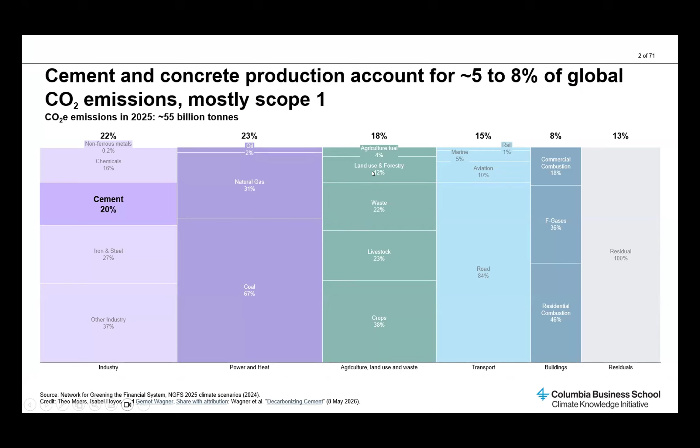And yes, I could easily go into some of this detail now in slides that frankly give a very high-level overview of where the problem is. Yes, in cement, it is clinker production that accounts for 85% of the emissions, and now we can pinpoint 3,600 or so cement kilns around the world, and basically start tackling this problem bottom up. But once again, just as a very quick reminder, here's why I think we are all here.

This is a map of the world. It is temperatures. Actually, to put it differently, it's not temperatures. This is literally how much of the change in the temperatures, pixel by pixel, degree by degree, around the globe, is attributable to excess CO2 emissions in the atmosphere. Right? 10 years ago, it would have taken climate scientists months, years to attribute global average warming to any one particular event, right? Massive storm, drought, and so on. Now we can do this. When I say we, climate scientists can do this like the weather report.

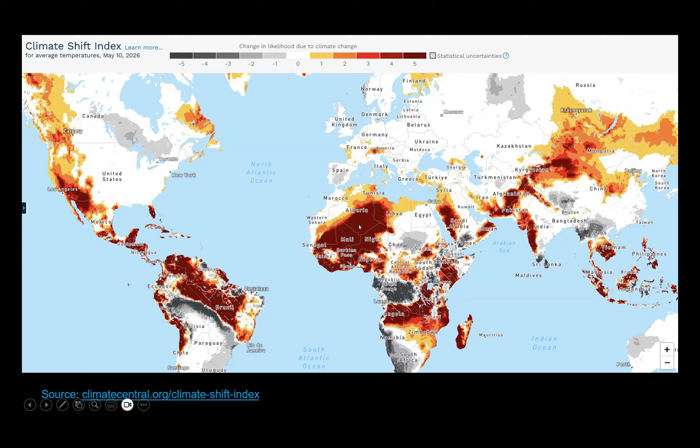Okay, so I'm not a climate scientist either, so I won't spend any more time on this, but we know what the problem is, and we kind of sort of also know the solution. And, don't blame the messenger, but it's always good to show a slide like this and not pointing to climate scientists, but to point to, for example, the Boston Consulting Group, in saying that, yes, here is what needs to happen in order to achieve certain climate goals.

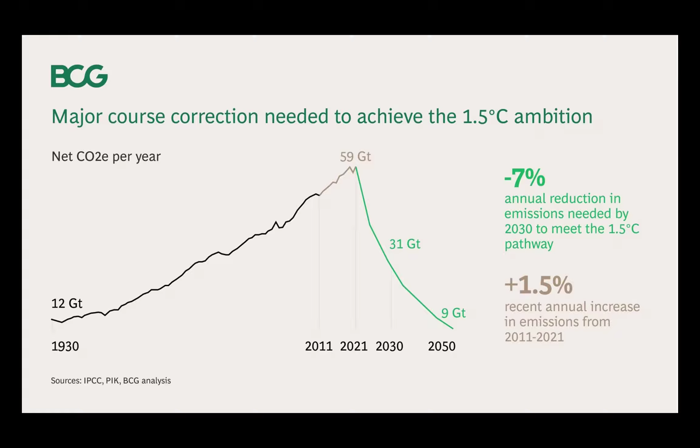And full disclosure, former employee of said consultancy, myself. Again, right, this is not, oh, BCG says that, or McKinsey says that, but it is simply the reality check. Here's the flip side of that reality check. And this is a very US-centric view of the world, and you need to know a little bit about US politics to truly appreciate this graph.

And obviously, this is not cement decarbonization technologies. This is renewables and batteries, for that matter, to enable the decarbonization of electrification around the world. But of course, that is the point, that what we are talking about, for the most part, including for cement and steel decarbonization, are technologies that will actually solve what we need to do. And technologies, by their very nature, can only get better and cheaper over time.

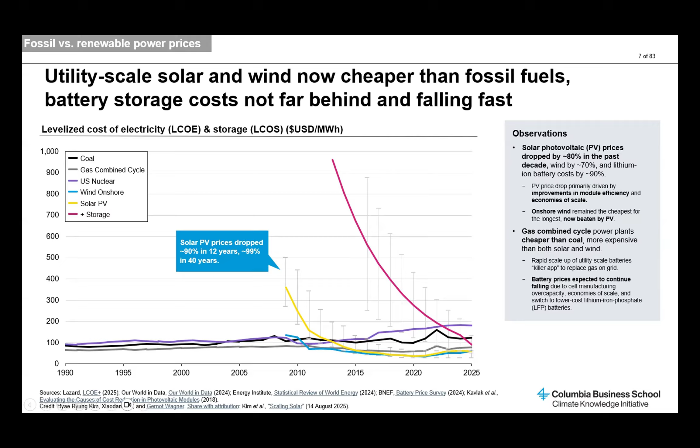But if the techno fix is to look to technologies to decarbonize, well, again, the direction is clear. Those technologies can only go in one direction. Okay, I blamed BCG before. Let me blame McKinsey, or in this case, this is one of my classes. So when a senior partner of McKinsey shows up, he comes with a few slides, which then means I get to steal these slides and show them to others.

Here is the McKinsey version of the world in how to look at these decarbonization technologies sector by sector, technology by technology. And the one thing you might be looking for here that you won't be able to find is cement and steel, or cement and iron, for that matter. There's carbon removal. There are some other fundamental technologies that are important in decarbonizing steel. There's hydrogen, for example, listed here. What's also clear, of course, is that 90% of those technologies are out of the money at the moment.

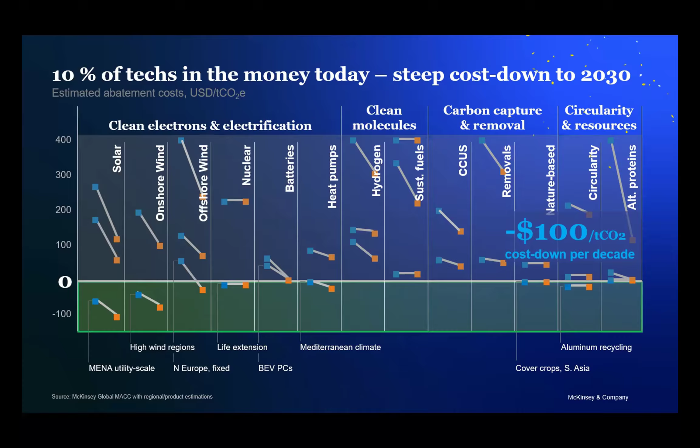Yes, it takes policy. This flip, by the way, is not me. This is McKinsey itself as well, basically saying that, yes, with the right policies, proxied here by $100 per ton of CO2 price by the year 2030 globally. Newsflash, won't happen. But let's just assume that this is the kind of fundamental policy driver.

Yes, back to my own take on things, there are now lots and lots of different policies that, when one dives into the details, will help deploy fundamental technologies that some are in fact in the money at the moment. And okay, a sector like cement, ruthless competition, of course, if it is cheaper to deploy, it'll happen quite automatically. And if it won't, it takes something else.

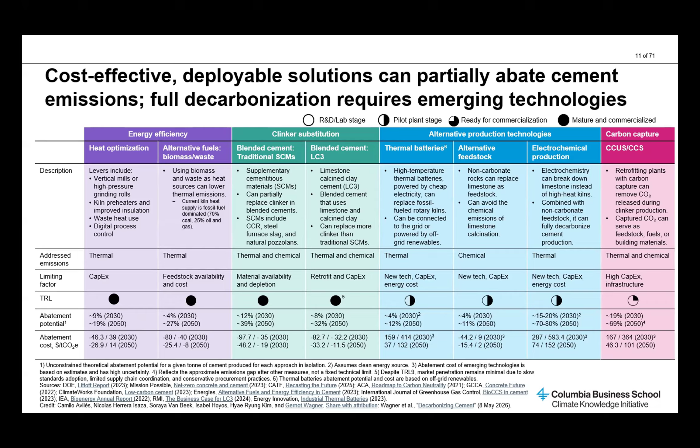It takes top-down policy, it takes bottom-up procurement policies, it takes lots and lots of other detailed policies to deploy these technologies to actually make a difference on the decarbonization front. Here is a different slice at the exact same data. One of these marginal abatement cost curves, for those who know what that means.

Abatement potential on the x-axis, costs on the y-axis. And yes, there are some that right now, 2030 is on the left, 2050 on the right, already pay for themselves. Lots of uncertainties on how much they cost. Yes.

Not a lot of uncertainty around certain kinds of interventions, especially those under the heading of efficiency, basically substituting expensive inputs for cheaper, lower carbon ones, or for that matter, using less clinker in the first place, as one sort of simple techno fix, if you will, that runs up against trade-offs, of course, but still.

Okay. Three quick points in my last three minutes, Alfredo, if I still have three minutes. So here's one. Not if, but when. Right? None of this is if. It is when. This is sort of the classic business school conclusion, right? And if that's the case, then yeah, it is all about speeding up deployment of existing technologies, or for that matter, figuring out how to get the balance right into the R&D necessary to then go to the next D, deployment, right? Research, development, deployment, demonstration, diffusion, and so on and so forth.

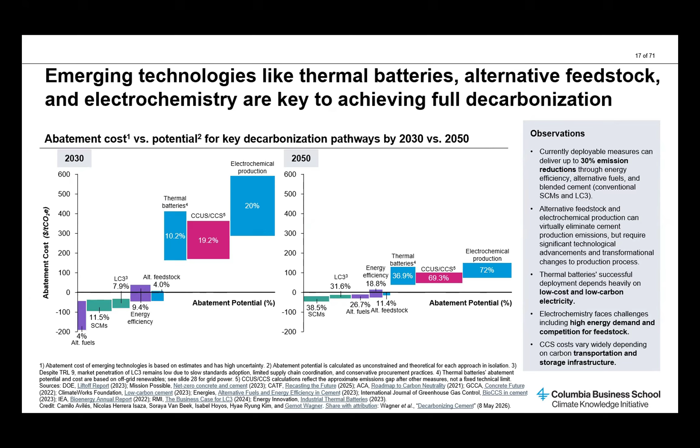Which, of course, leads to the third and last point, which is who pays, right? So the big question, and as an economist, it's always hard to say that there is finite money in the world, right? There is not. The pie always grows, and so on and so forth. But at the end of the day, yeah, there are three sources of money in the world. It's shareholders, consumers, households, industrials paying for the cement, the steel, for example. And then there are taxpayers.

And it's not a secret that there is a fierce political battle among those three groups, where, yes, the CEO of the cement company is going to earnestly say, of course, we are interested in doing X, Y, and Z, but we can't possibly ask our shareholders to pay for it, or our consumers for that matter. So please, subsidies. And that circle, of course, continues no matter where one looks. So when you then look at technologies like LC3 that actually pay for themselves already under certain circumstances, there is the clear question now, who is best positioned to actually take advantage of this?

And let me just end here. Happy to say much more in the Q&A about any of this, of course. But there are certain reasons to believe that sometimes it is developing emerging economies that are actually best positioned to deploy some of these newer technologies, in part because it is a fast-growing sector, in part because costs matter a lot, in part because they are not encrusted structures, tradition, lock-in effects at work, where, yes, Western players, very much looking at the cement industry now, are often looking to CCUS as the techno-fix, carbon capture and storage, right? The add-on that needs to be subsidized, the add-on that needs to be driven by policy, while some others in emerging economies are looking at the more efficiency-focused, cheaper, possibly more impactful technologies from the get-go.

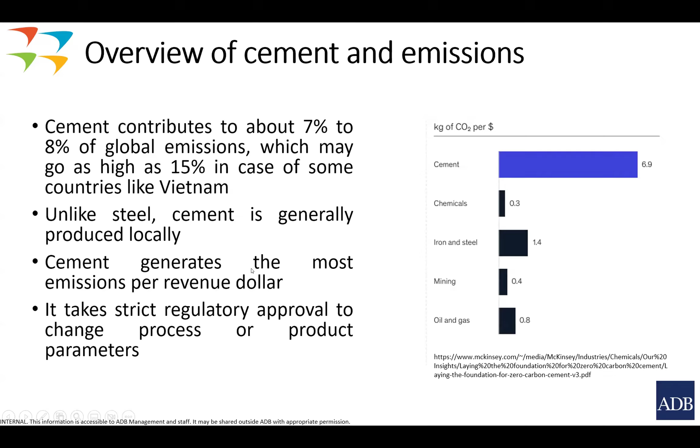Now, let's go a little bit deeper into the whole life cycle of cement making, and at what stages, what is the emission and what is the energy being used. We start with mining. Mining is where 40 megajoules per ton of energy is used, and 3 kg per ton of cement is the emission taking place.

Then you go to crushing, transport, raw mill, and the biggest contributor to emission and electricity is the kiln process and the calciner. This is where the amount of energy used is the largest. More than 70% of energy goes into the kiln, and it also contributes more than 70% of emission. So kiln, calciner, and pre-calciner are the biggest contributors to emission. So our biggest attention for decarbonization will go to this place, followed later by the other processes, which will be cement mill, cooler, logistics, etc.

Now that we have seen all these different processes in cement making, let's try to understand how we reduce the emission. So what are the options? For mining and transport, electrification of the mining vehicles and biofuels is one place where you can reduce emission. When it comes to crushing, transport, and raw mill, renewable electricity will help. Since electricity is used, again, SF6 emission will be there. Energy efficiency will always be helpful everywhere.

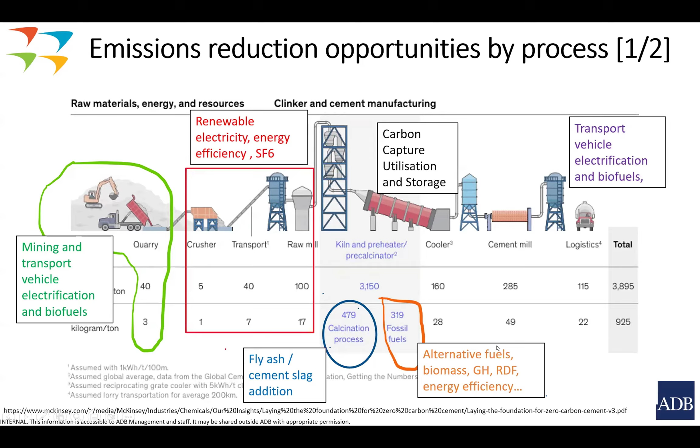Now, let's try to go to the next place. So when we want to see the emission reduction, ultimately, the emission reduction will start with baseline emission minus project emission. That is the old way of doing it. Rather than going to the newer way of classification, let's go the traditional way. So baseline is the most important thing that one has to see. So emission reduction calculation, how we go about it.

Many a times we don't have the data to determine the baseline, and measuring baseline at each and every place will be a little difficult. So one can go a little bit of a conservative way, setting the baselines a little bit higher for lack of data, but we can arrive at some reasonable amount. So one can use the standardized baseline for grid electricity wherever there is one. And in most of the large countries now, fortunately, grid electricity emission factors are available.

Then one can also go for baseline setting based on established international or national standards, collection of past information on energy consumption when we have national regulation already. That is what will help in establishing plant-specific data. But this is actually a fairly rigorous process. One has to establish those regulations, how to measure, etc. For a longer period of time, one has to standardize that, and then one can have the final numbers. But that is one of the best ways to do it.

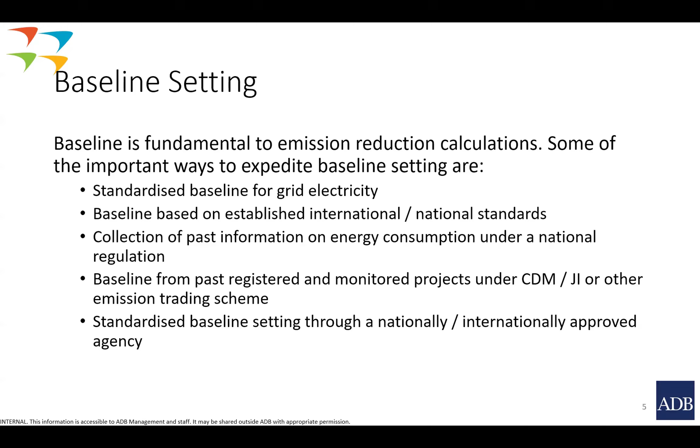Now, the emerging opportunities, and these are some of the later opportunities which are there. One is use of graphene to strengthen the concrete, and it is still very new. Addition of graphene can increase the strength in such a way that it will reduce your concrete usage by almost 10%. That is one of the things. Second thing, what Professor already advised us, was use of LC3.

Then the next thing is substitution of limestone, to replace ordinary OPC with geopolymer cement. That is one of the methodologies which has come. The links are given; we can see it later on. But this is going to be a really interesting thing.

Emission reduction in transport, of course, that is a modal shift option: move to railways, move to something like shipping, etc. And that can work for the clinker as well as the finished product. So that is one of the things one can do. Then change of fuel from fossil to biofuel, we have seen it already earlier. Cast concrete technology is one of the other technologies. The link is given over here; whenever you have time, it can be seen.

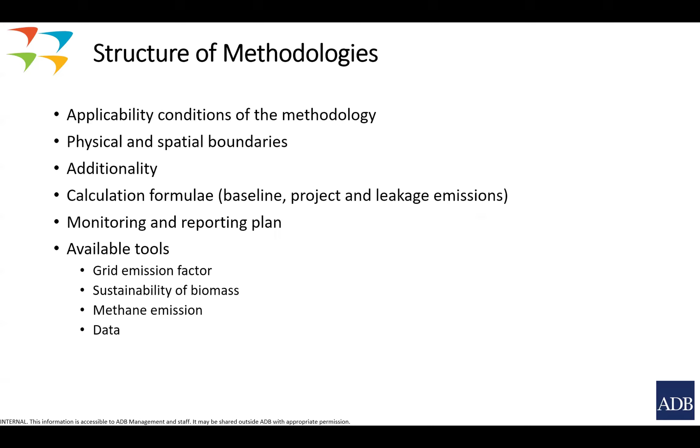Then, having understood the opportunities, the structure of the methodologies is like this. One is the applicability conditions of the methodologies. Then physical and spatial boundaries. Additionality will have to be proven, because we don't want double accounting or business-as-usual cases to creep into the projects when we are trying to get emission credits. Calculation formulas will be there. Monitoring and reporting plans will be there. And there will be a number of tools which will help us to determine grid emission factor, sustainability, methane emission calculation, etc.

Now, issues in baselines will arise when we are trying to switch the fuel. When there is a new plant, there will really have to be a case made for what you take as your baseline fuel. Because baseline fuel generally will be coal, but there can be areas where baseline fuel may be natural gas because coal is not available, in which case the whole baseline will go down and emission reduction itself will come down. That is a likely possibility.

Often, baseline setting is considered at the current baseline, whatever is established practice in the current project. That is something that can happen. Uncertainties can be there when we are establishing new baseline conditions, which can be availability of fuel, availability of regulation, availability of manpower, etc. So these also will have to be taken into account when we are establishing the baseline.

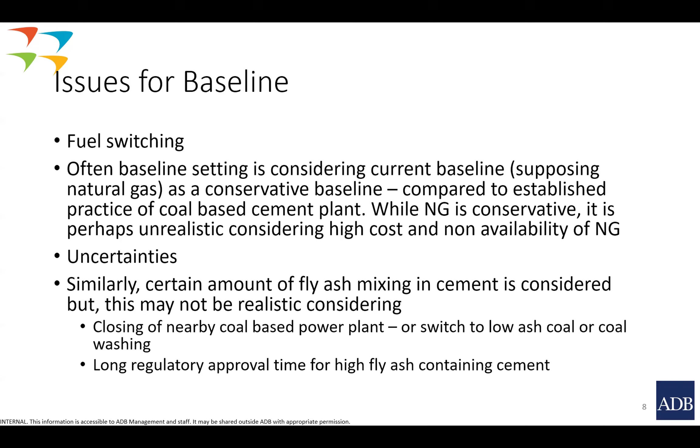Now, when fly ash is mixed in cement for reducing emission, it may be possible that the existing coal-fired power plant, which is the source for fly ash, is going to close down. So taking that for baseline will be an issue. Or long regulatory approval: as I said earlier, when we want to mix fly ash, the regulators are more concerned about the basic strength of the cement itself when we are mixing the fly ash. That is something that will have to be considered, that it will take a long time before fly ash will be coming up.

Now, I'm going by some of the examples which are available under the Clean Development Mechanism. This is project 0473 for optimal utilization of clinker and substitution of clinker by fly ash in India, OCL. In this project, fly ash usage is in PPC manufacturing. Infrastructure modifications are to be done. It requires technological modification. Fly ash transport is added. A fly ash adding mechanism is to be introduced in the whole cement plant, along with installation of a cement vertical roller mill and improved bag filters.

These are all improvements that have to be done in the cement plant compared to the baseline condition. The methodology used for this particular project was ACM0005, and the registered project design document is available through this link. The additionality was proven using combined tools, where technological barrier and market barrier were discussed. The technological barrier is that all these improvements were not there, and it was probably done for the first time in that particular country. Market barrier is, of course, very important. People won't trust cement having such blending. So that is a very much recognized barrier.

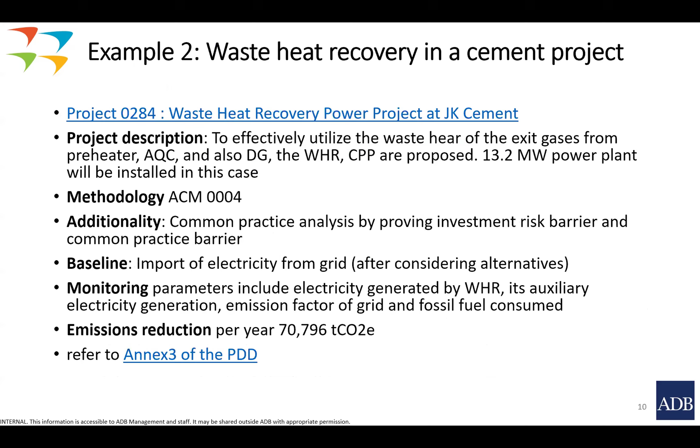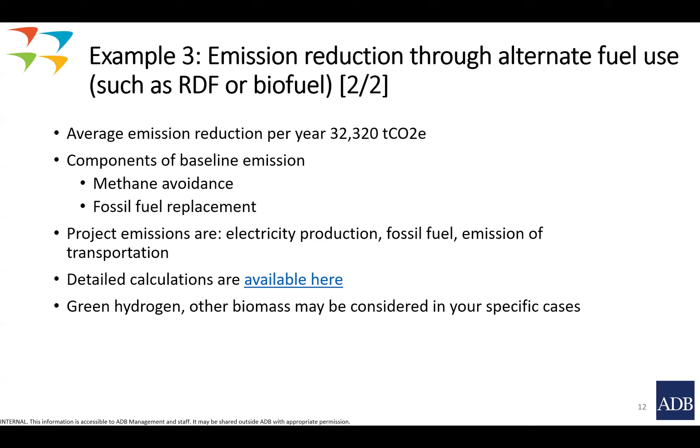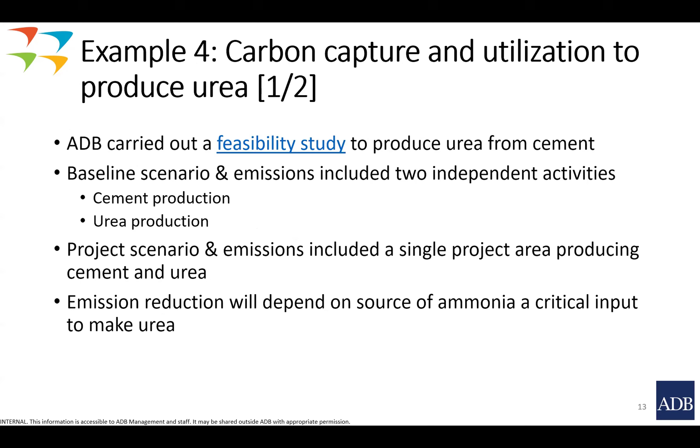So that is the whole thing. This is again now considering the methane emission, which is very much a part of RDF and biofuels. And the other links are there. I think this last part, I'll just leave it for now. It is too futuristic as of now, but let me just tell that it was carbon capture and utilization: capturing CO2, blending with hydrogen and making urea out of it. The numbers you can see over here, we can come back to that later on.

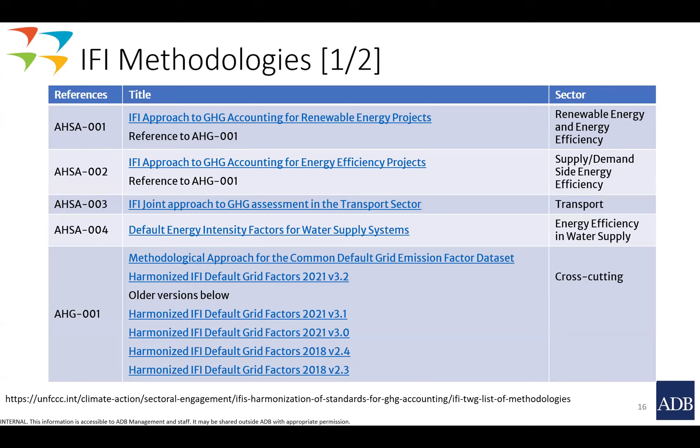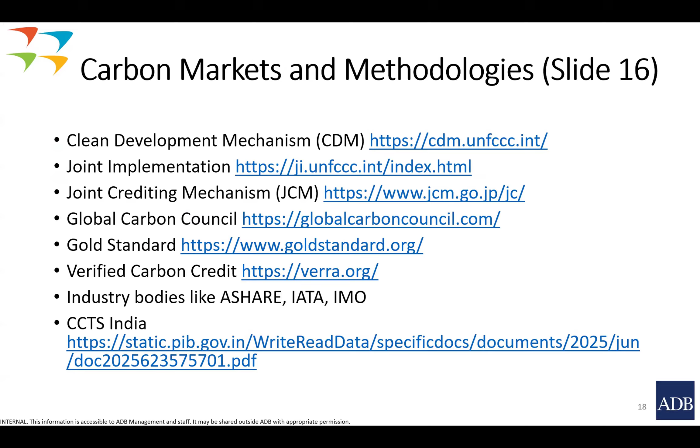And now these slides are giving the GHG emission methodologies which can be used in cement sector in case of CDM. Then current IFI methodologies are given in these slides. And considering the fact that we are not restricted only to CDM now, there is joint crediting mechanism which is coming up. Then joint implementation methodologies are there. Then there are voluntary carbon mechanisms. Then IATA, IMO, etc. are also there. So these are the other carbon markets which may be of use to you.

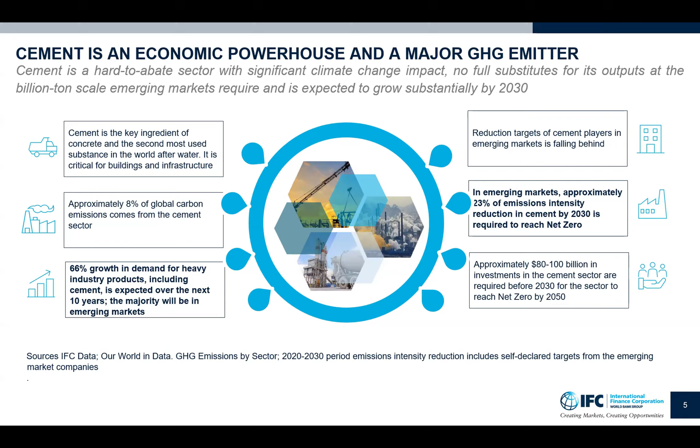And 66% of growth in demand for heavy industry products, including cement, is expected to take place over the next 10 years, and the majority will be in emerging markets. So emerging markets account for approximately 23% of the emissions intensity reduction required by the cement sector by 2030 to reach net zero. So it is important that we work closely together with key stakeholders in trying to support the decarbonization of cement in emerging markets.

Now, I wanted to also highlight some of the challenges that clients face in emerging markets to scale decarbonization investments. One, which has already been mentioned, are the financial constraints. There's a significant upfront capital investment, limited commercial viability, and a lack of low carbon premium carbon markets required for deep decarbonization projects. So there's different types of decarbonization levers. Some of them are in the money and don't require the concessionality that was spoken about a few minutes ago. But others, such as CCUS or newer technologies that have a significant impact on carbon reduction, do have commercial viability gaps that need to be addressed.

There's also technical and operational challenges: outdated technologies in emerging markets that may result in higher emissions, and limited availability of commercially viable technologies to address the inherent emissions due to the low level of maturity or industrial patents.

You also have limitations from the access to alternative materials and fuels, so limited access to cost competitive alternative materials to reduce the clinker ratio, and limited access to alternative fuels to reduce the reliance on fossil fuels is also another limitation that companies face.

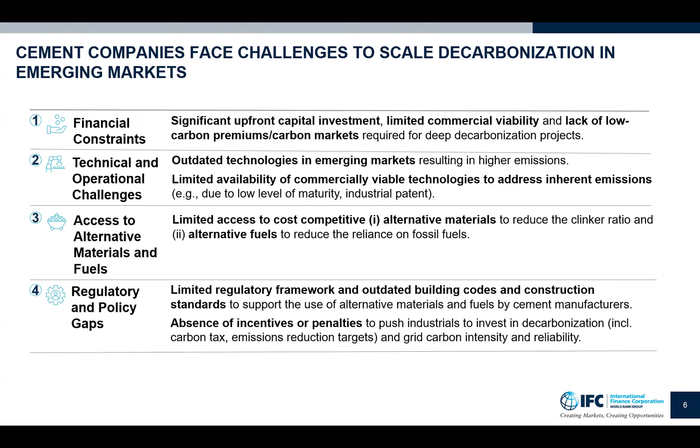And then there's the regulatory and policy gaps, right? Emerging markets may also have limited regulatory frameworks or outdated building codes and construction standards that enable the use of alternative materials and fuels by cement manufacturers. Or there also could be an absence of incentives or penalties to push industrials to invest in decarbonization, such as carbon tax, which was already mentioned by another presenter, or emissions reduction targets, and grid carbon intensity and reliability.

So with all of these challenges, right, the decarbonization of cement requires a new paradigm in emerging markets. The speed of project execution is critical. Underwriting with partner institutions and public-private sector collaboration has become more crucial, right, to be able to really scale these investments in emerging markets. So we need to be quicker in mobilizing with our established relationships with a cohort of DFIs, commercial institutions, and different types of fund providers, so that we're able to bring adequate financial solutions to emerging markets.

We also have to work to collaborate with different stakeholders on developing risk mitigation and blended finance solutions to also close the commercial viability and the financial gaps that some of these projects have. And then we also have to work together on catalyzing innovation through supporting venture capital investments, right, in new emerging technologies, and try to get these piloted, so that they can demonstrate their technical feasibility and close the commercial viability gap.

So our approach in the cement industry focuses on supporting companies that are pursuing low carbon investments that enhance competitiveness and sustainability of their operations. We support sustainable production of cement, prioritizing projects that are geared towards enhancing sustainability. We provide long-term financing, sustainability, and green labeled financial solutions. We support clients in modernizing their kilns and boosting efficiencies and switching to alternative fuels, such as biomass and refuse-derived fuels. We support companies in defining or validating and enhancing their decarbonization roadmaps.

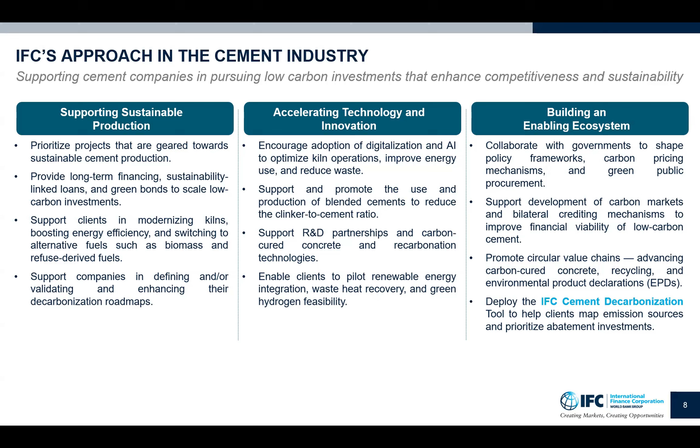And finally, we are working with governments and different stakeholders in building an enabling ecosystem that really supports the scaling of these investments in emerging markets. We promote circular value chains by advancing carbon cured concrete, recycling, and environmental product declarations. And through the deployment of the IFC cement decarbonization tool, we also help clients map their emission sources and prioritize abatement investments.

In terms of the cement decarbonization tool, and Claudine will go more into details on how this looks in practice and the type of information that we gather from this tool, it's the first step in the decarbonization journey for companies. The tool generates MAC curves that allow the ranking of investment projects by cost and show the expected impact in terms of dollar per ton of CO2 equivalent, with the purpose of helping companies identify the most viable and the most impactful investments and help them in prioritizing their investment plans.

It's based on the MAC curve that we can help structure decarbonization pathways and financing solutions for our prospective clients. And I think Professor Wagner showed a bit of what the MAC curve looks like, and then Claudine will go a little bit more into details on how it works. So through this tool, we believe that we're also adding value to our clients, by providing a bit more visibility of their baseline, but more importantly of how some of the investments that they can prioritize really can have an impact and a financial return.

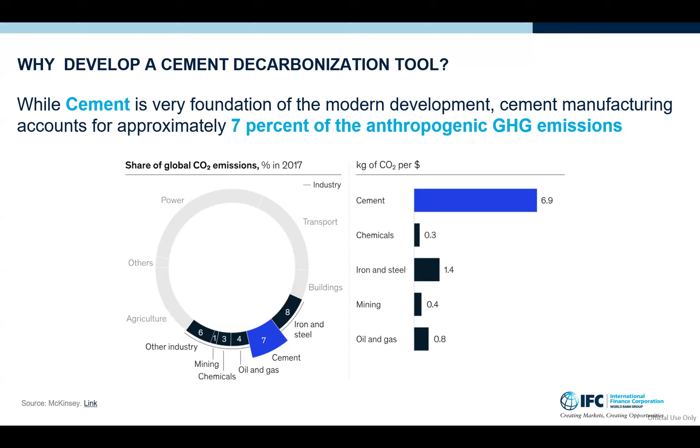It is clear that we need to move from credible baseline modeling to mitigation estimates that stand up in investment plans and can support a pipeline that actually mobilizes finance. So what did we envision for the tool, or what was the reason we created the tool? The aim was to have a decision support and business development tool to help cement companies specifically identify decarbonization opportunities and assess what feasibility studies to actively pursue and potentially aid in facilitating green and sustainability-linked financing, which Margarita has already spoken about.

So it provides a very high-level first-cut analysis, I must indicate, of decarbonization levers on the pathway to net zero, very importantly. It lays the foundation for the engineering feasibility work rather than replacing it. So it starts very high level. In other words, it helps teams move faster from, we have baseline numbers as a company, or this is the baseline for our kiln, to we have prioritized a short list of measures worth developing into investable projects.

So to place it in context, and I think this has been discussed by previous presenters, the sector has identified multiple levers that are needed to achieve net zero. And these levers mature at different speeds. The practical planning challenge is sequencing and prioritizing. So what is feasible and commercially viable now? What becomes necessary beyond 2030, but still faces viability gaps? And what is emerging and needs upstream support?

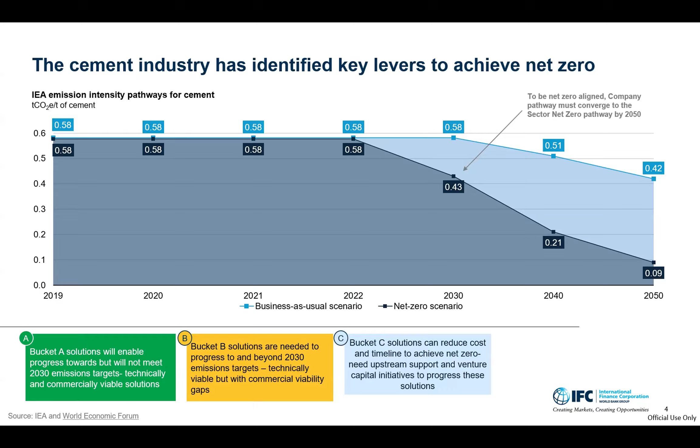So if I go to the IFC and the IFC's approach, just taking a step back, GHG assessments have evolved. Initially, assessments could be more qualitative. But as net zero targets have become clearer and clearer, there's been need for better quantitative signals, and thus the development of the tool. It is aimed to help clients, and cement clients specifically, understand their key levers and their potential to impact Scope 1 and Scope 2.

I must state that the scope is Scope 1 and Scope 2 emissions and is modeled around the GCCA's CO2 protocol. The IFC has, however, also partnered with a company called Sustain 360 to pilot a more comprehensive approach that covers Scope 1, 2, and 3, and the broader life cycle attributes. For those of you who may have attended the previous session, you would have been introduced to Sustain 360. So the tool itself focuses on the GCCA methodology and on Scope 1 and Scope 2.

And the reason is because, specifically for pure play cement and clinker companies, the Scope 1 and Scope 2 emissions make up the largest part of the GHG emissions of the company. And I think that was mentioned, even by Daksha. So the way to interpret this is that the tool is a practical engine for early screening and prioritization, while more comprehensive approaches can complement it where a full life cycle view is required.

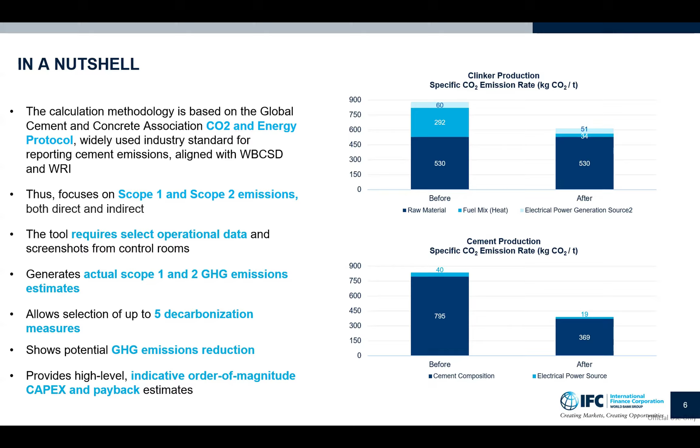So I must state, though, that this is aimed at being a facilitated intervention. So the tool itself is not something that is kind of plug and play, where you can just put your data in and you get the answer at the end. I mean, we would have to be involved to assist in actually developing that plan, because it hasn't been developed to the level where you can just input your data.

So to give you just an idea of the type of information, it's plant information, as indicated. You start with your clinker, your kilns, some input data there. Also, your fuel emissions data is important. Your energy inputs, what type of energy, clean energy, whether it's off grid. We look at grinding equipment and other key pieces of equipment. And then what assists is if we have screenshots from the control room, but also information on key pieces of equipment, what type of equipment is used.

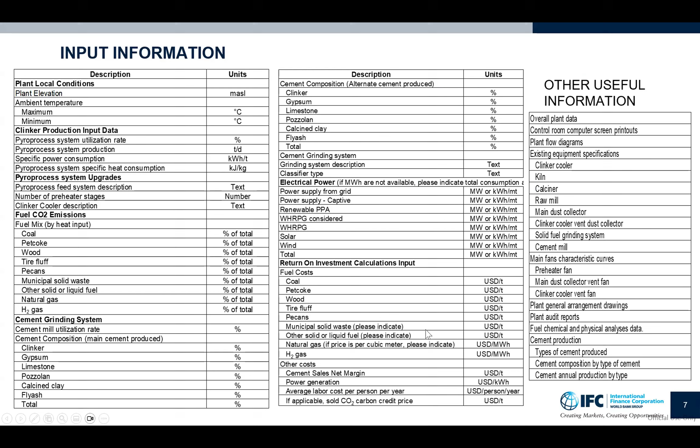So this is the type of input that goes in. And generally we haven't had major issues in obtaining the information. Where the information is not available, there are standards in the methodology which can be used where the actual information is not available.

So the tool is designed around the 5 levers, as I mentioned. And the levers themselves are alternate fuels. So we start with, excuse me, what different types of alternate fuels can be used, your electricity or power mix, what are the options, such as wind, solar, blended cements. So we spoke about things like substituting limestone, pozzolana, calcined clay, fly ash and slag.

Waste heat recovery was spoken about. If we had to institute waste heat recovery, what are your options there? And then also select equipment configuration. So if you had to replace maybe some older equipment or change your equipment configuration, what the impact on GHG emissions downstream would be.

These levers were chosen because they basically sit into the buckets I mentioned earlier, your A and B buckets, which are technically viable solutions and often commercially viable solutions, or sometimes they are definitely technically viable, but may need some commercial support. And that's the reason we focus on this scope in particular.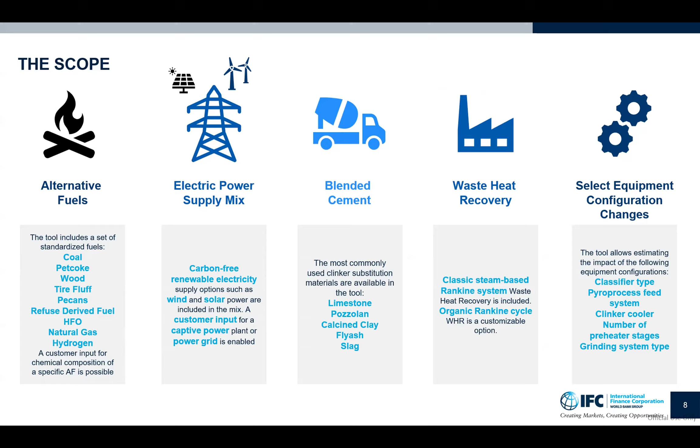So what is the outcome at the end of it? What you end up with is, the outputs are designed to show you a prioritized set of investments, a technically and financially viable view. So total identified investments for viable projects, the GHG abatement potential over the lifetime of the project, and the marginal abatement cost curve, as Margarita and others have mentioned, alongside initial recommendations for operational improvements.

So for investment plans, this is powerful because it helps explain not only what reduces emissions, but what should be prioritized first, with a consistent logic that links measures to abatement and indicative economics. The key limitation to keep in mind is that the CapEx and payback estimates are generally order of magnitude. So it's appropriate for screening and prioritization and not to substitute full feasibility studies or analysis.

So it's kind of the starting point. This is what you need to focus on to get you on your journey to net zero eventually. So it aids companies, and in turn, as companies adopt this, it can aid a country to achieve their GHG reduction targets.

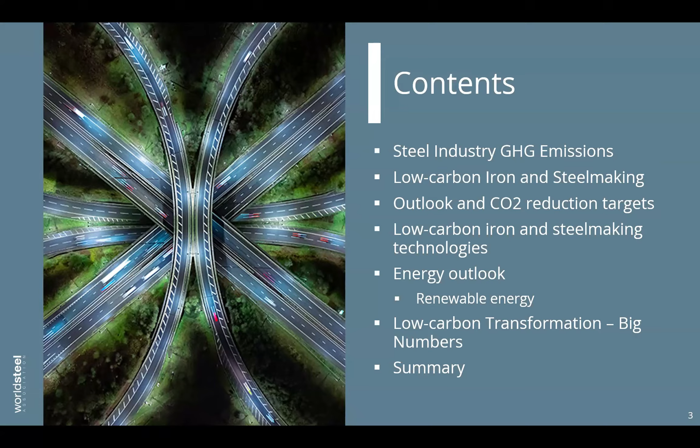So I'll just give you a very brief overview of the steel industry greenhouse gas emissions and what the steel industry is trying to do in terms of finding ways of decarbonizing itself in terms of technology. And then we will have a look at what the future looks like going forward over the next 3-4 decades. And because it's a very energy intensive industry, we are going to have a look at how the decarbonization very nicely integrates into the very broad question of energy. And then we are going to just have a look at what the transformation looks like in big numbers, and then I will just wrap it up with a bit of summary.

Scrap EAF uses much less carbon sources of energy, so that's why emissions are a bit low. The DRI EAF also is coming from the primary sources of iron, so that's why the emissions are a bit higher there. And the global emissions are calculated based on the weighted average, depending on what the setup looks like.

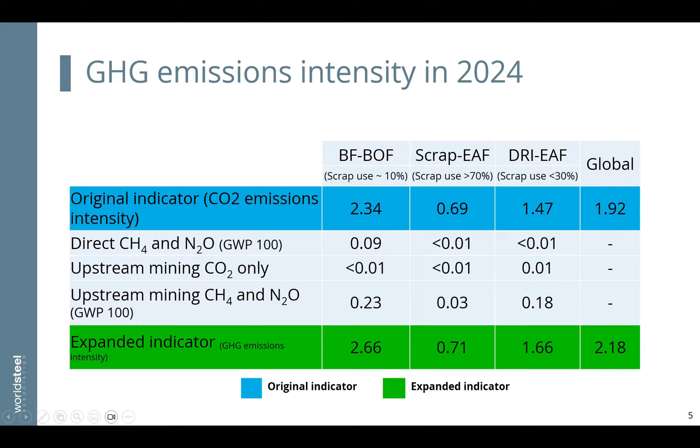But since 1 or 2 years now, we have started reporting the other emission sources, for example, the methane, the nitrous oxides, both from the upstream sides, from mining and transportation and other sources there. So that brings the number a bit higher. We get quite often the question why these numbers look different. So the explanation is that now we are reporting everything in CO2 equivalent. So that's why these numbers are a bit higher.

So how do we see the steel industry transforming over the next decades? It's very difficult to put a timeline or a very clear distinction between those stages, but we can, for the sake of argument, divide that transformation into three regions. The first one is the optimization, where we, working with the existing technology, try to squeeze as much efficiency out of the current technologies through process improvement, energy saving, process yield improvement, raw material quality beneficiation.

And then the transition stage, where you have already heard about the retrofitting of the bolt-on technologies or processes like carbon capture and storage, injecting other alternative fuel sources which are low carbon, for example, biomass and hydrogen, into the existing technologies. And then the very transformative process, which is the green technologies, where we start replacing the very high carbon intensive processes with the low energy processes, for example, using high quality scrap, making high quality steel out of it, and then the very transformative processes like using hydrogen direct reduction processes.

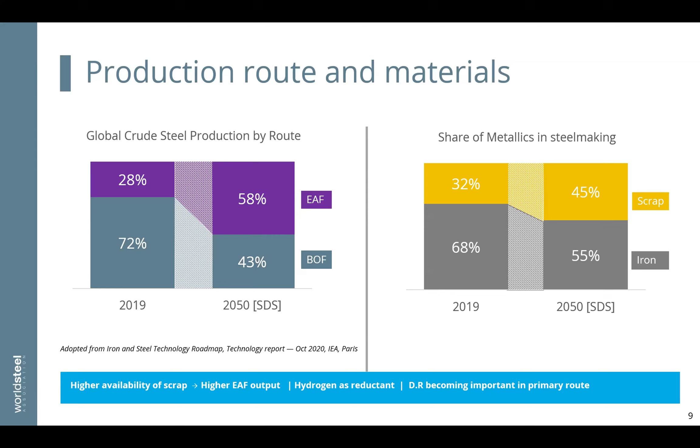So as I said earlier, there are two basic modes of iron and steel production. The biggest one, BF-BOF, right now constitutes 2/3 of the output. And then we have got the scrap-based EAF, roughly 1/3. But there is a very small amount coming from direct reduction, which uses predominantly natural gas right now, which is 5%.

The 2050 outlook tells us that this third one is going to quadruple. But not all of that is going to be run by natural gas or by hydrogen, so there will be kind of a 50-50 split among these. And the reason why we cannot go all hydrogen is going to come in the subsequent slides.

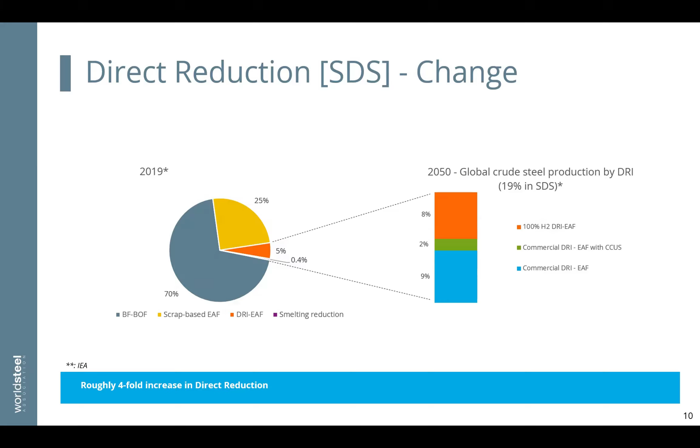So let's have a look at what technologies the steel industry is working on. There are different ways of avoiding carbon intensity. The first bracket is that we stop using carbon by, for example, using green sources of electricity, produce hydrogen and use those in our processes, either by direct reduction or electrolysis or melting scrap and then producing steel out of that. And then there are some novel ones also that we are working on, which are a bit lower on the technology readiness level, 4 to 6 right now.

Carbon recycling uses mostly bolt-on processes, for example, using carbon capture and storage with the existing technologies, or smelting reduction using carbon capture and storage. Carbon reduction is where we use natural gas, of course, because it's still a lower CO2 intensive process compared to using blast furnaces, and is at a higher TRL level. And then if we talk about biomass, biochar, there is still some way to go because it is still at a lower TRL level.

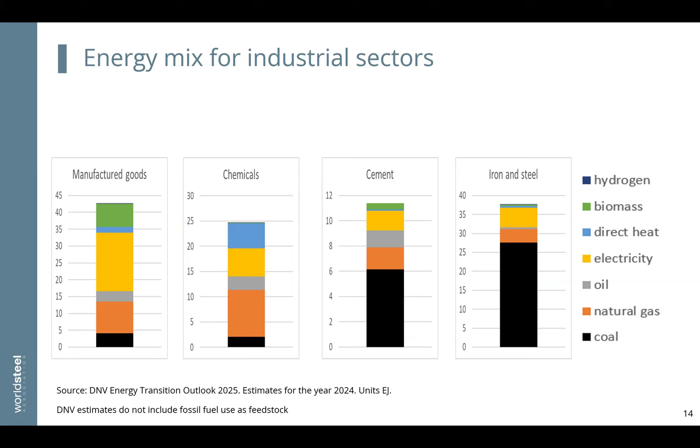Because every industrial sector and every part of society is trying to move away from fossil sources of energy, if we look at the outlook from now until 2060, by 2030 we see the energy demand peaking. And from that time onwards, there are projections of more and more removal of carbon from our input to various industrial processes, not only steel, but cement and various other sectors. So coal, oil, natural gas are going to start reducing and will be replaced by non-fossil sources, solar, wind, nuclear. So that gives us quite a big hope, but also reminds us that not everything can be decarbonized as we would like to hope.

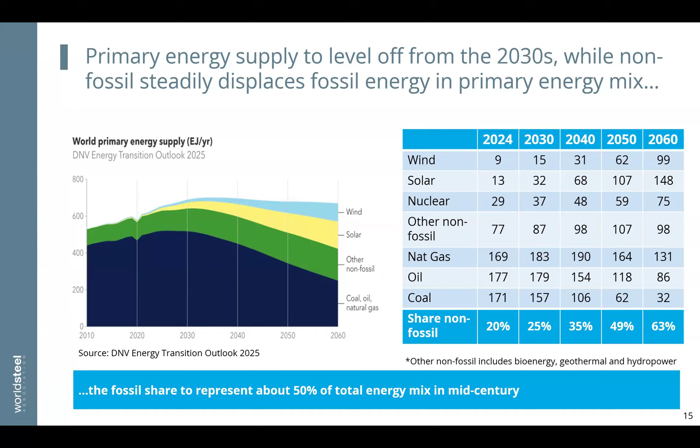Some of the projections that you might see coming from the International Energy Agency are aspirational figures. But that does not mean that everything we aspire to can be translated into practical realities. This data is coming from DNV, which is a think tank and consulting agency from Norway. They have got much more realistic figures based on ground realities, so that's why I'm using these figures here. The share of non-fossils is going to increase from 20% now all the way to 63%. And from that point on, we will start struggling against those ceilings where it takes much more effort to decarbonize than we would like to hope.

And what are those constraints there when we try to push the boundary above this level? So some of that information you have already seen there, that the solar PV and onshore wind costs have dramatically come down, and they are projected to go down even more. But that does not mean that the overall system costs are going to reduce. If we look at solar PV, for example, it has come down by 90% from 1.5 decades back. The same thing is for onshore wind.

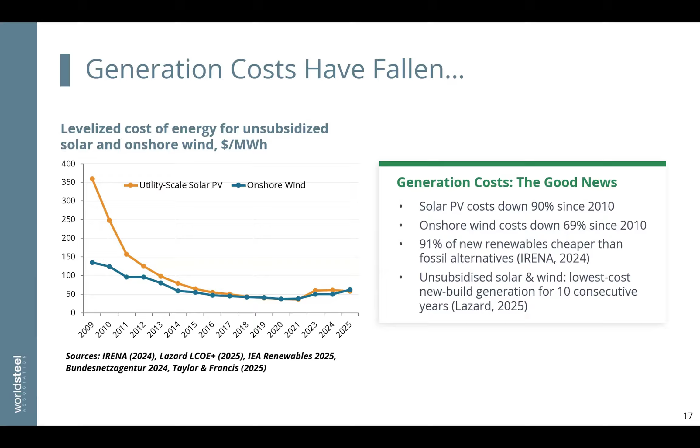So even though we see that the generation costs are coming down, we see that the integration costs are pushing it upwards. So several countries, for example, which are very bullish in trying to move away from fossil fuels, seem to be ending up paying higher costs. So take the example of Germany. Germany has to pay roughly upwards of 90 euros per megawatt hour because of all of these obstacles.

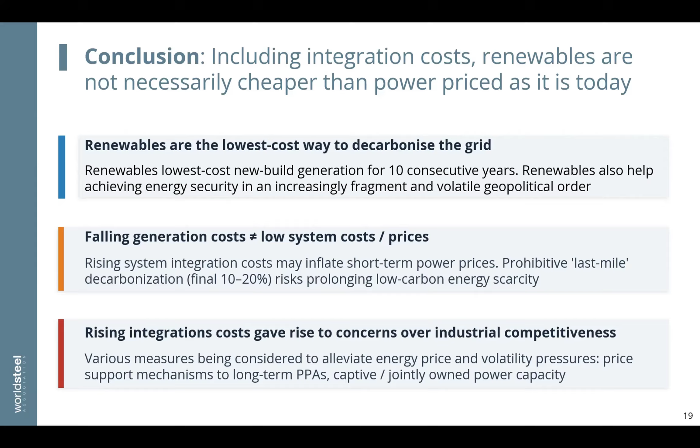So in conclusion, on the topic of energy, yes, renewables are the lowest cost way to decarbonize the grid. And if the grid decarbonizes, it has got a knock-on effect for the other industries which rely very heavily on it. We see the falling generation costs, but they do not necessarily translate to lower system-wide costs, which, for example, are paid by the end customers, by the heavy industries. So, because the costs are not going down as steeply as we would like, that also reflects in our ability to decarbonize, because of the question somebody raised there: who pays for that transformation? So that's quite a big question that we do have to answer.

So if we were to look at big numbers, what does it mean in terms of investment decisions? The lowest cost in terms of percentage of abatement can come through BF optimization, because we are working with the existing infrastructure, existing technologies. If we were to start substituting fuels we can easily bring down our CO2 intensity, and by that extension require less input in terms of investment. So BF optimization, using more scrap, expansion of the EAF fleet.

But if we were to really go for the highest absolute decarbonization, that can come from those radical processes or the bolt-on technologies. For example, if we very heavily deploy CCS on our BF fleet, we can reduce CO2 intensity, as well as with the hydrogen-based DRI processes. So starting from the top row all the way down, the difficulty in terms of investment cost goes higher and higher and higher.

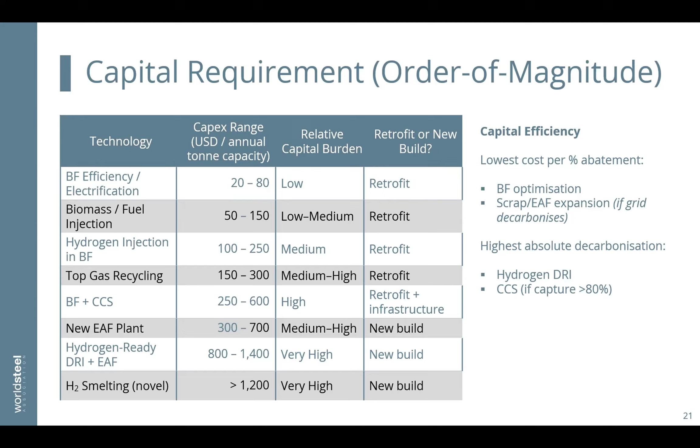So what are those levers of change that we can work on? The energy system and infrastructure development, as I said, is one of the biggest levers that we should be mindful of. Carbon costing is going to play quite a big role in leveling the playing field across the world. We see quite a lot of those carbon costing mechanisms started mainly in the EU. Now we see that coming up more and more in emerging economies like China and India.

Of course, we need willing customers who are going to somehow pay for the low carbon steel. And if we can extend the life of our products, for example, reusing, repurposing and recycling steel, then we use less steel, and by that extension we use less energy and produce less CO2. So in summary, the steel industry is not just a local thing, and somebody mentioned in the beginning that it's a global thing, but it still has got regional flavors.

There's a growing trend we see quite frequently talked about there, that we are working on technologies which are quite radical, dramatic, but they are not all at a very high TRL level. So we still have to iron out some of the obstacles. So the coming decades will be transformative, but we need policy and public support, and it requires concerted effort across

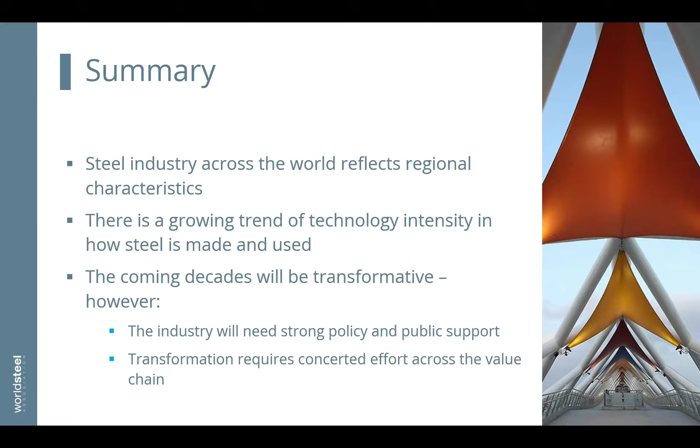Thank you so much, Dr. Rizwan. It's always fascinating to hear the diagnostic that you made in terms of CO2 emissions and energy outlook for the steel industry. It was also good to see the different levels of technologies that can change this picture, all the way from carbon direct avoidance, recycling, and reduction technologies, and definitely good to hear your summary on some of those levers for change that are so much needed, and some of those we're definitely hoping to tackle through the Industrial Decarbonization Program.

So thank you so much, Dr. Rizwan. Now we're going to move ahead with Ashish Kumar. He's a steel industry specialist for the IFC. And he's going to be speaking a little bit about some of the investments that IFC makes and IFC's approach towards these multiple technology pathways for decarbonizing the steel sector. Ashish, over to you.

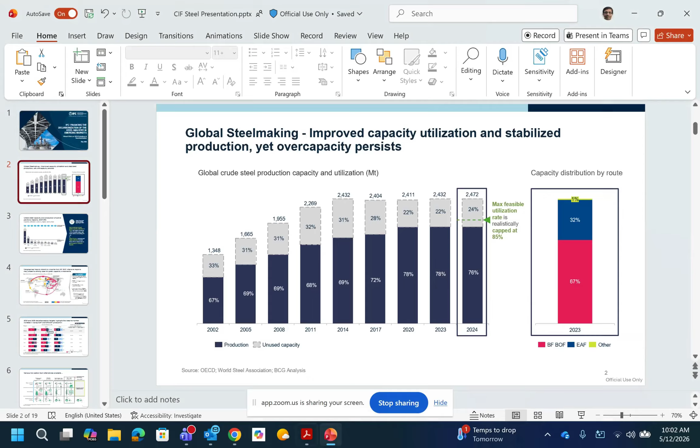Actually, sorry to interrupt you, but we cannot see it in full screen mode, just FYI, we see the main slide. Oh, okay. Let me do that. I'm having some technical issues. You know what? Let me stop sharing. Why don't you share it? Will that work? Yes, absolutely. It should be loading on your screen right now. Let me know if that works. Okay. Yeah. Next slide, please.

All right. So talking about the total capacity, the installed capacity is about 2.4 billion tons that the world can produce. But again, installed capacity cannot be your operational capacity. The best case scenario you can have is about 85% or so. It's very, very difficult to go beyond 85%. So as you can see, right now, the world is at about 76% capacity utilization.

Can't go beyond 85%. It has improved from 67% to 76%, so there is an improvement of about 9% in capacity utilization here. But again, 85% is the kind of limit that we have to set for ourselves. There are certain countries that have exceeded it, but only in very rare cases. You need to have downtime for all kinds of things in the steel industry.

I have worked in the steel industry for a number of years. So I have experience on both sides of the table. I've been a customer of the steel industry, and I've run steel plants as well.

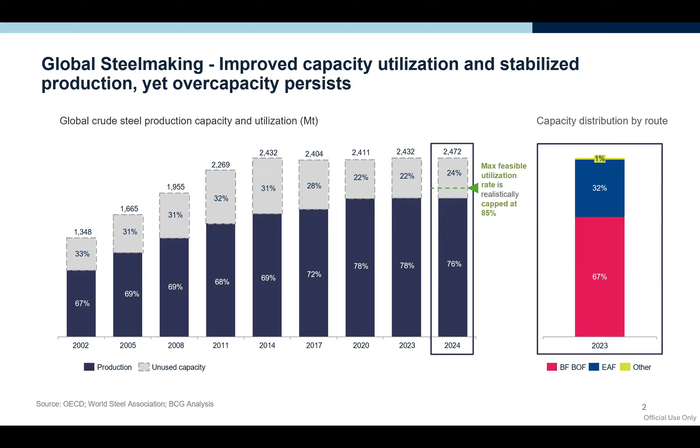Out of this, as Dr. Rizwan presented earlier, about 2/3 or 70% of the total steel produced in the world is coming from the blast furnace, basic oxygen furnace. These are highly carbon-intensive processes. About 32%, well, it will be lower than 32% because we have other processes as well that we'll see in the following slides. Can we go to the next slide, please?

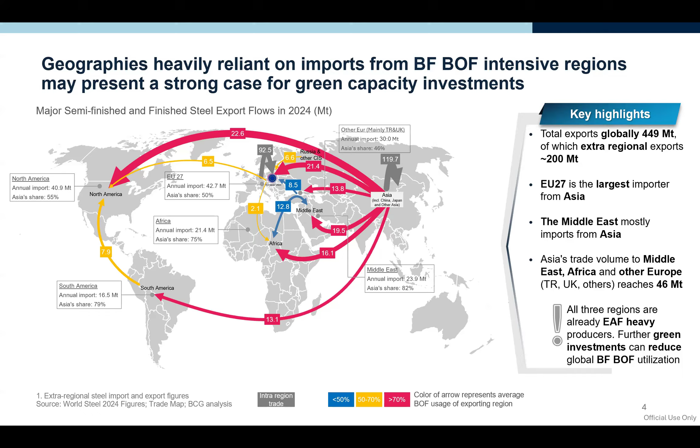Now the question may be, why can't you reduce it altogether? You can't. There are certain types of steel requirements that need blast furnace steel only. It could be more technical if I go into the details, but there is other research going on to see how we can effectively manage our scrap electric arc furnace steel to have the same type of properties, same type of qualities.

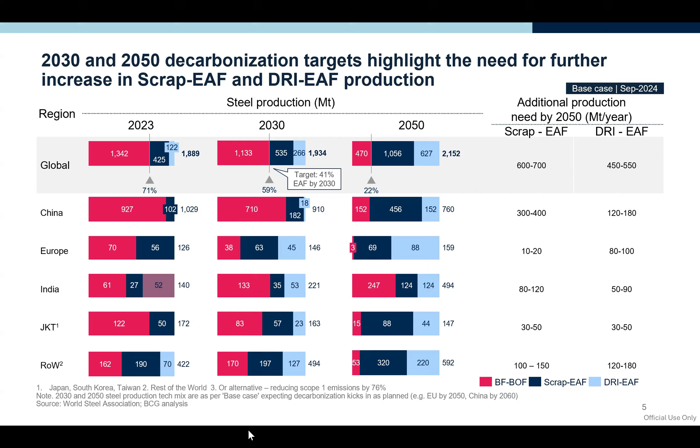Next slide, please. Next one.

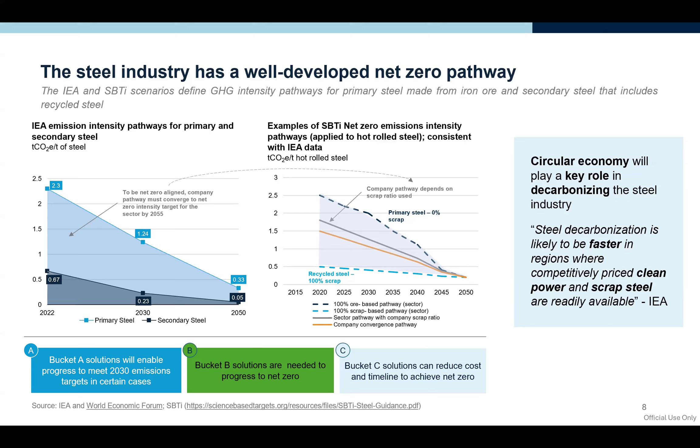But as you can see, even if you were to use your iron ore based industry, there are ways where you can get to this point. So there are different buckets out there. So we'll talk about these buckets in detail in next slides. Next slide, please. I think I'm already running late on my presentation, so I'll go quicker now.

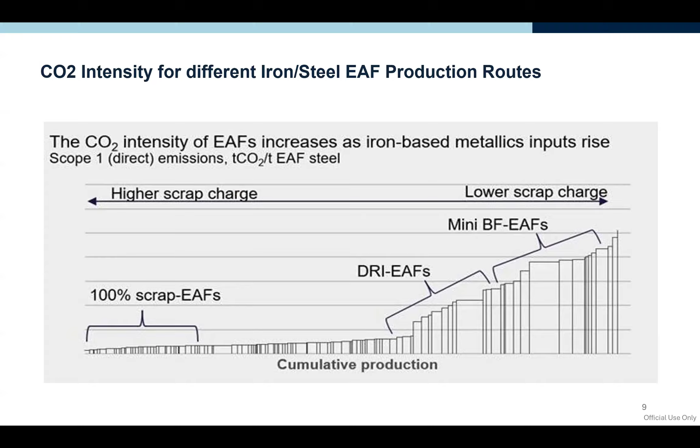So this is what it shows, your carbon footprint, your scrap electric arc furnace, very low. You go to your blast furnace, electric arc furnace, and then it kind of jumps up dramatically. And right in the middle of this, as you see, DRI EAF steel producing route. Next slide, please.

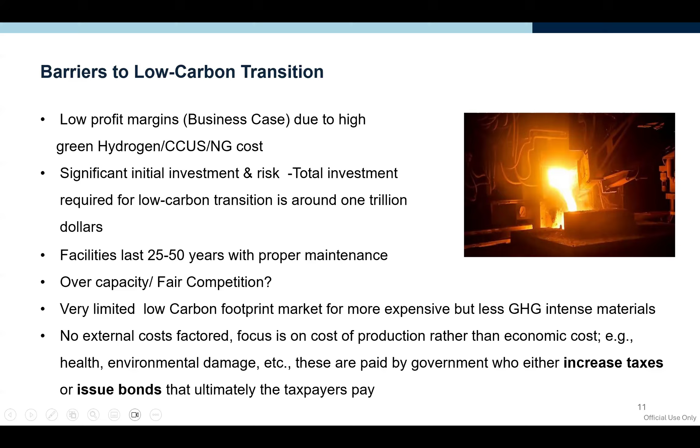All right, let's move on to next one. I mean, I have a few more things that I can talk about, but looks like I'm already running late on this.

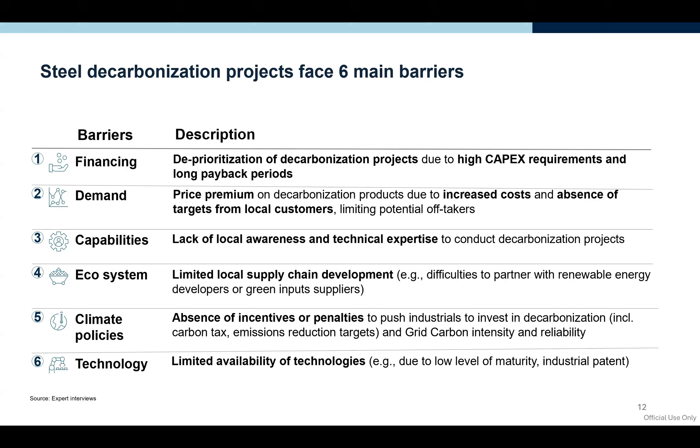And the technology, there are a number of other technologies that are being worked on. MOE, which is molten oxide electrolysis process, it has been worked on, but it's not a proven technology yet. There are some other technologies that are being worked on. Next slide, please.

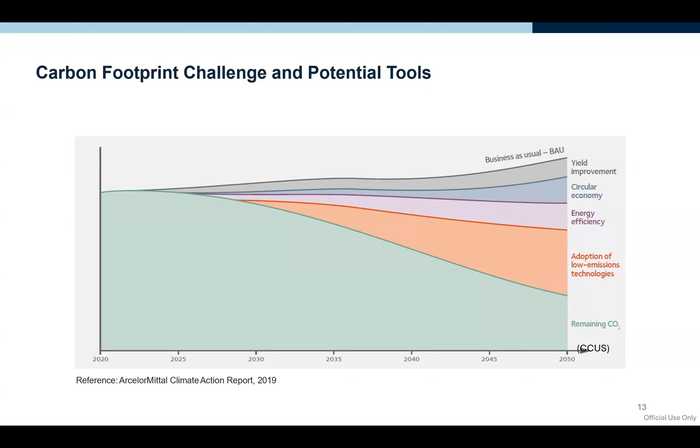And the circular economy is another big thing that you can do. Your energy efficiency in the system, your yield improvement. So yield improvement, energy efficiency, they can be clubbed together, and together they can make a big chunk of carbon footprint savings here. Next slide, please.

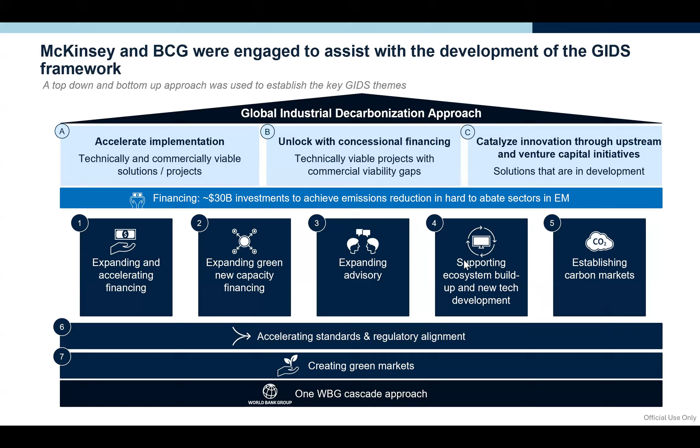Also, your presentation, to hear IFC's take on removing or addressing the barriers on different technologies that are out there to decarbonize the steel sector. We've heard all the way from energy efficiency, circular economy, but also low emission technologies, and at the end the near to mid or long term approach that's taken by the IFC. So thank you so much, Ashish, for that.

I think for the sake of time, we're going to skip this Q&A and go straight to our final speaker so that we can leave a longer space for Q&A. With that in mind, I would like to ask Darshak again, who you've already met. He's Senior Carbon Capture and Utilization Specialist for the Asian Development Bank. He's going to go into more detail around the GHG methodologies that the ADB uses, particularly for the steel sector on this occasion. So Darshak, over to you.

Thank you. Let me just share my slides. Please let me know once you see them. Share, and here I go. We can see them. Okay, I'll put it in full screen mode. Yeah. Perfect. Okay. We can see them.

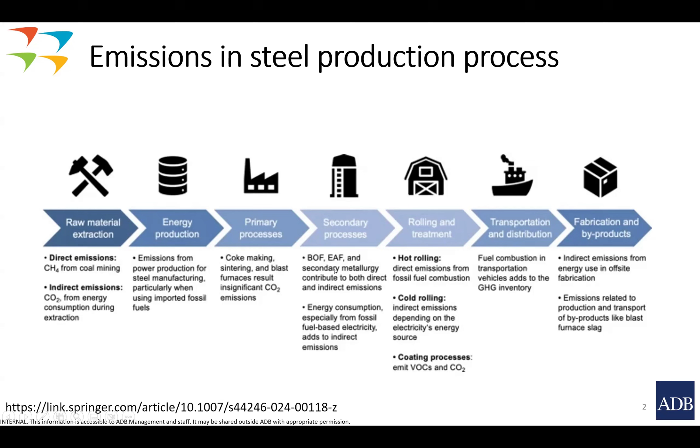So let us try to go to the next step as to what happens. Now, when it goes to steel making, just a second, I'll try to remove this if possible. You still see this? Okay.

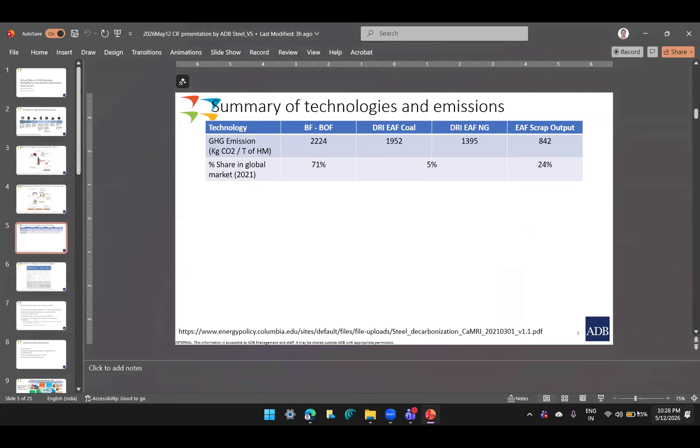Yeah. Sorry. Okay, just a second. Sorry, there's something funny happening over here, and okay. Okay.

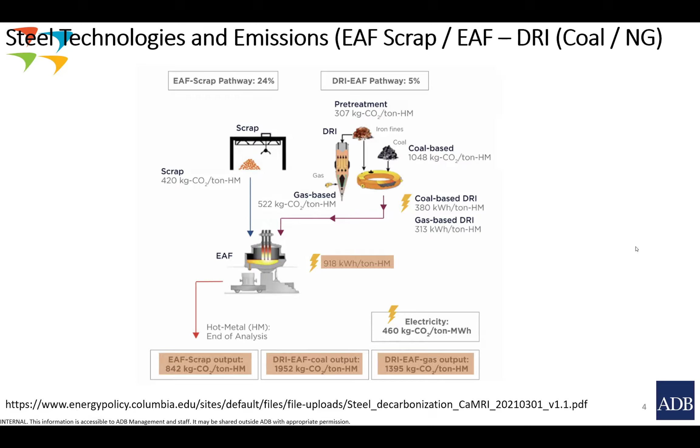So, having understood this broadly, let me try to summarize what it looks like for different iron making processes. These are broad numbers and need not go into the nitty-gritty, but based on the earlier slides, GHG emission in the BF-BOF route is about 2.2 tons of CO2. Then in the DRI-EAF coal-based route, you will have 1.9 tons of CO2 per ton of steel produced. When we go to the natural gas route, it will be almost 1.4 tons of CO2. And finally, for scrap-based steel making, you have an output of 842.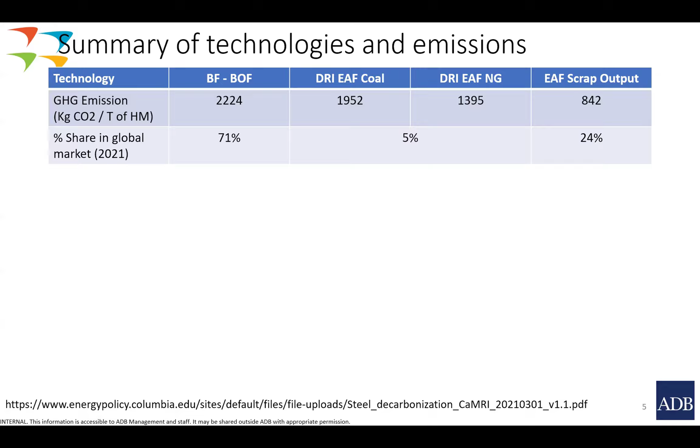And based on the market share of all these processes, we have 71% of steel coming from the BF-BOF route, then 5% from the DRI route, and scrap comes to 24%. These numbers have been taken from certain literature, and the link is given over here.

The idea now is that the current baseline scenario of 71, 24, and 5% is giving us a weighted average emission of 1.8 tons of CO2 per ton of steel produced. If we change this technology mix in the medium term, and medium term is a relative term in the steel industry, because each blast furnace and major equipment has a lifespan of more than 15, 20, 40 years almost.

So in the medium term, when the end of lifetime comes up, if we can shift the BF process from 71% to 51%, scrap remains around 24% because of availability of scrap, and the DRI-EAF route increases from 5% to 25%, then we will be able to reduce from 1.857 tons of CO2 per ton of steel to 1.713.

If we go to the next step and alter this mixture further, we can get to about 1.5 tons of CO2. In the process, we will be increasing electricity consumption a bit, but that is good enough for us because it is going to help with overall emission reduction, and the electricity grid, as we say later, is going to be greener.

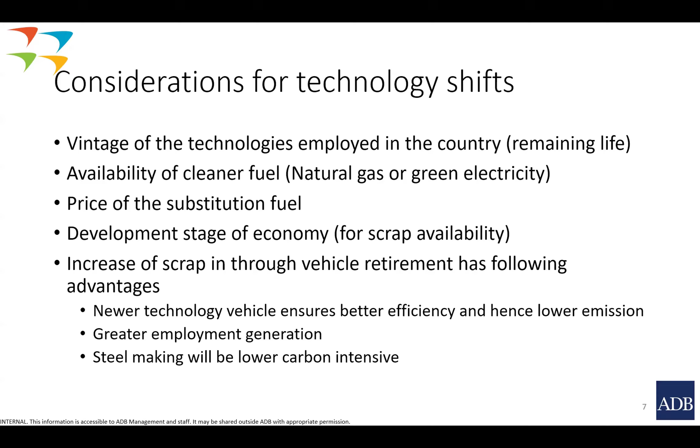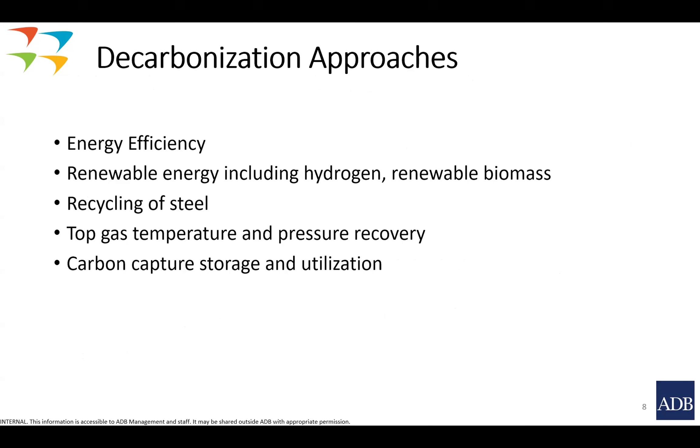So what are the decarbonization approaches? These are well known and have already been discussed: energy efficiency, renewable energy, recycling of steel, and top gas temperature and pressure recovery. Finally, carbon capture, utilization and storage. Now let us see how different companies across the world are perceiving this. This is an example from the roadmap of JFE Steel in Japan.

What they are planning is that they will be using a lot of renewable energy. They will be using hydrogen. They will be going for carbon recycling, meaning they will be using methane, natural gas, as fuel. CO2 will be emitted, blended with green hydrogen, and recycled again. So it's a circular route, and except for green hydrogen, it can go on.

The other route, as the experts will say, is instead of going for hydrogen, one can also go for a CO shift by injecting CO2 and hydrogen to create CO plus H2, and that can also be fed. That's another route, but more or less the concept remains the same.

Now, the other company is, of course, POSCO, which is trying to shift to hydrogen-based steel making. It is investigating production of hydrogen gas through nuclear reactors with focus on newer and compact modular designs. ArcelorMittal has got its own strategy, which is DRI and electric arc furnaces. So they are trying to move away from coal to electricity, natural gas, and hydrogen readiness.

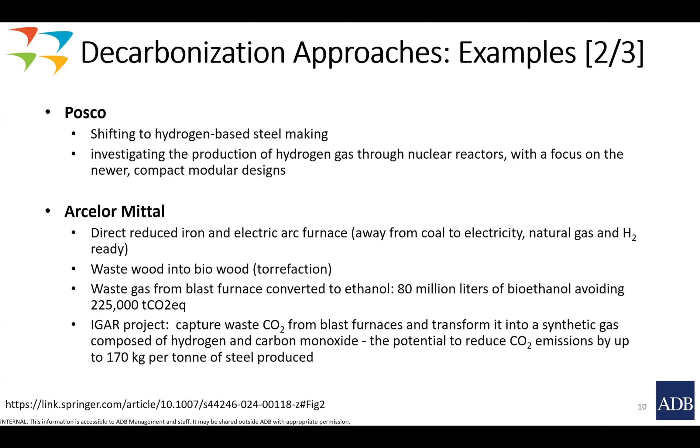Waste wood is also used. Biomass has been seen as a very good pathway. Then waste gas from the blast furnace has been used to make ethanol. That's a plant using LanzaTech technology, and they have been able to save something like 225,000 tons of CO2 and so on and so forth.

One more example we are taking again from JFE. Now, steel making is a very specific process. Certain expertise lies with the metallurgical engineers and people in the steel industry, so they cannot be expected to run a chemical plant. This is an example of a CCU project. The approach taken is that they have captured CO2 and are trying to make it into methanol, but the model is they are shifting it to Mitsubishi Gas Chemical, for which making methanol and other things is its own core production process.

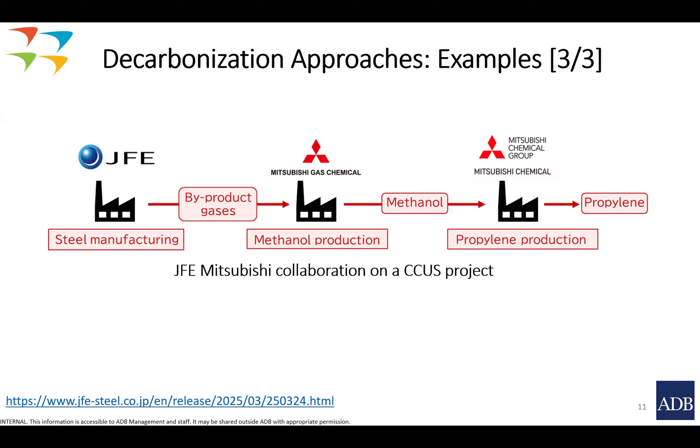Methanol is a very strong basis for chemical engineers. From there, a lot of other products can be made. So this methanol is passed on to the chemical group, which is going to put it properly into production. So such permutations and combinations of business models can be thought of.

Hydrogen, as we have seen in an earlier slide, has a number of production routes. Today, SMR-based hydrogen gives us 12 kg CO2 per kg of hydrogen made. Then there is the newer technology of methane pyrolysis coming up, which gives 3 to 4 kg of CO2 per kg of hydrogen produced. Of course, the economics will be based upon availability of natural gas or biogas in the region where you are applying. Compared to the US, the cost of hydrogen will depend on the cost of natural gas, and the raw material will be very different. The advantage of methane pyrolysis is it eliminates the whole carbon capture process, which is very interesting.

Methane pyrolysis might still be at TRL 6, 7 or 8 at most, so it has some time to go. But organizations like IFC or development institutes will be looking for newer technologies, and this is a small snapshot of that.

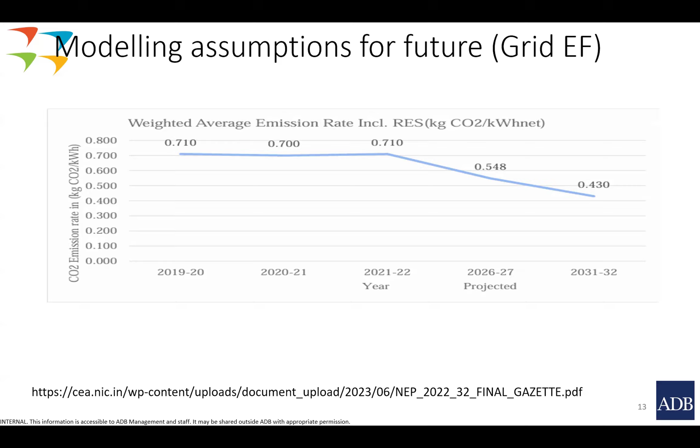Now, in the case of CCUS, what are the different assumptions you may want to make? What is the maturity of capture technology, which is very much evolving, and fast. Carbon market development will be important, because if your carbon market gives you a price of $20 or $30 to $40 today, when capture costs $60 or $70, it may not be good. But 5 or 7 years down the line, carbon prices may go up, and then these same technologies might be useful.

Storage facility should be available somewhere. CO2 transport infrastructure is needed. Cost effectiveness of CO2 derived product is also very important, because the CO2 derived product in case of CCUS costs 3 to 4 times compared to the normal product available for fossil derived products. So unless you have somebody really ready to pay that kind of price, it may not be very much possible.

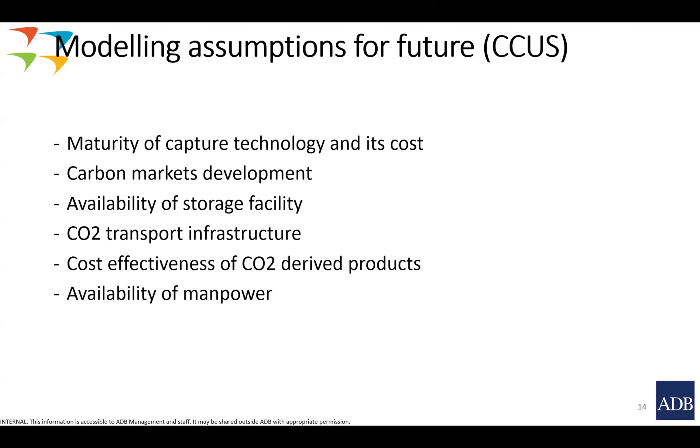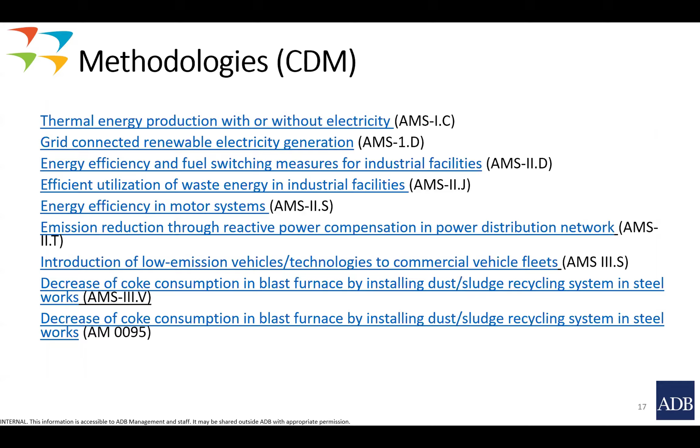Availability of manpower is one more thing which may hamper things. Now, these are the slides which were already displayed earlier, so I'll just skip through them. And we'll come to some of the case studies, as we had seen in the cement sector.

Now, this is a project wherein blast furnace gas was used and fed into a 300 megawatt combined cycle power plant in Anshan Iron and Steel Company. Methodology used was ACM 004. Additionality was proven through investment analysis, in that the internal IRR of 13% that was required was not met.

Baseline was import of electricity from grid, which was 1.07 compared to almost zero emission factor over here. And emission reduction was almost 1.7 million tons. And monitoring, of course, of electricity generation from power was there.

Biomass-based power generation was one of the other tools that we had seen. In India, the project description was a 10 megawatt rice husk-based power plant which was put up. Methodology used, AMS-I.D. Baseline at that point of time was 0.96 tons of CO2 per megawatt hour, which was probably available from grid at that point of time.

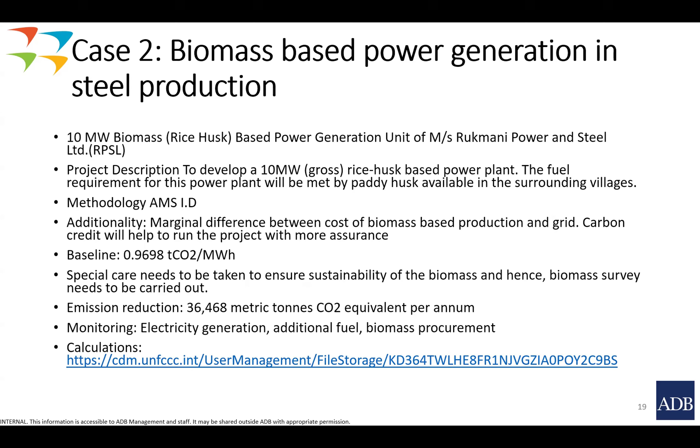In this case, special care needs to be taken to ensure sustainability of biomass, a point already discussed by the previous speaker, which is a very important factor when it comes to projects, especially with biomass. This kind of project had reduced emission by about 36,000 tons of CO2. Electricity generation, additional fuel, etc., are monitored.

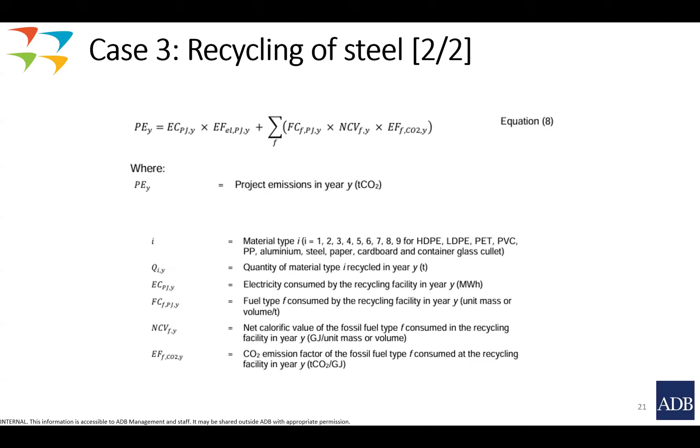When you do the recycling, the project emission will come from the emission factor of the electricity used in recycling and processing the steel, and of course the fuel used. And sorry, I would have loved to have one other slide giving more basic information: the emission reduction would be the baseline emission arrived at in this slide minus the project emission. So these are the examples, which you are free to access.

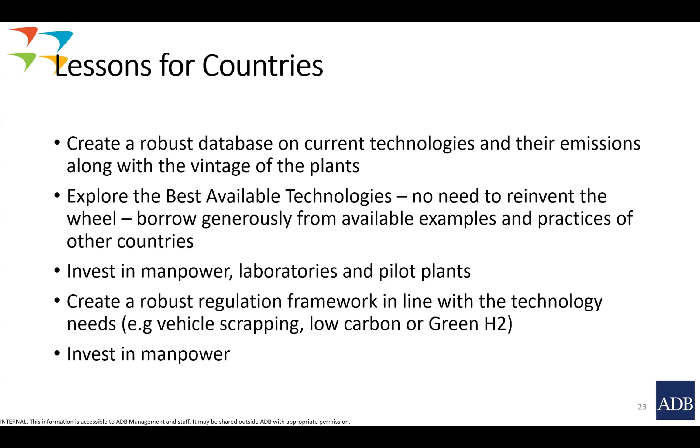Invest in manpower, laboratories and pilot plants. Pilot plants are one of the most important things, because they give very valuable experience to people and confidence to implement a good technology. And then one has to really go for a robust regulation framework so that people are encouraged to go forward with newer technology.

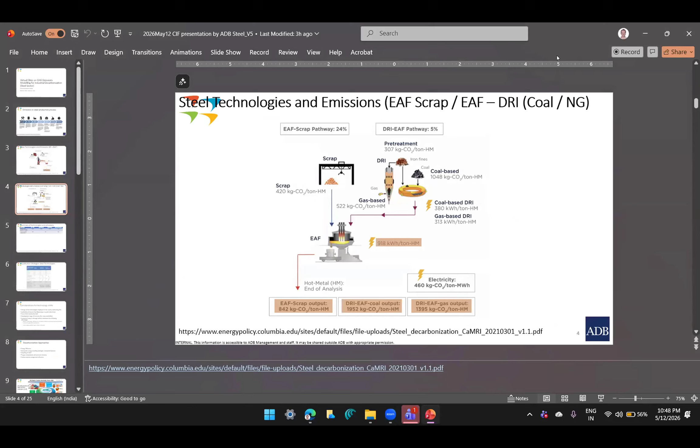Thank you so much, Darshak, for that detailed explanation. Definitely very interested to see what's the Asian Development Bank's take on GHG accounting, both baseline and other types of scenarios from the steel industry as well, not just the cement one. And I think it's always good to see some of those examples that you were showing at the end of some technologies and projects that the ADB was betting on and was investing in: the blast furnace gas combined cycle power project, the biomass-based power generation project, and obviously always the part in recycling of steel. So it's always good to illustrate with those examples.